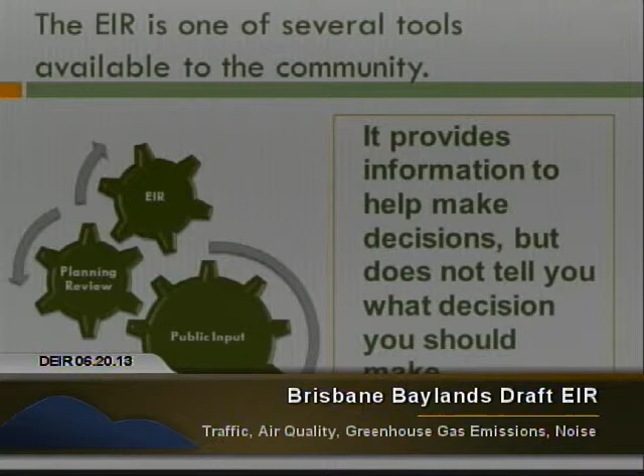He's doing great. The EIR, in a lot of communities, will be looked at as the answer to everything and provide everything we need to know. Really, this is just one of the tools that you as a community, the planning commission, and ultimately the city council will have to make a decision about the project. And I'll describe what that project is.

Besides the environmental impact report, which will tell you about the environmental changes that would occur with the project, there is a planning review: does this fit with our view of what we want the community to be from a planning standpoint? Does this fit with our rules? And then public input from the community: is this what we want to see for our community?

That will be part of the public hearings that come at the end, the written letters that come in from you on the EIR, and the testimony that will go on. Only after all of that will the Planning Commission and ultimately the City Council make a decision on the Baylands and development of the Baylands.

The review that we're going through now is a 120-day period, and that's much longer than the typical 45 days that communities get to review an environmental document.

Given that this is 1,200 pages long and very detailed, and it's such a complex project, the City Council determined that a 120-day review period was appropriate, and that's what we're going through right now. The document in front of the community is called a draft environmental impact report.

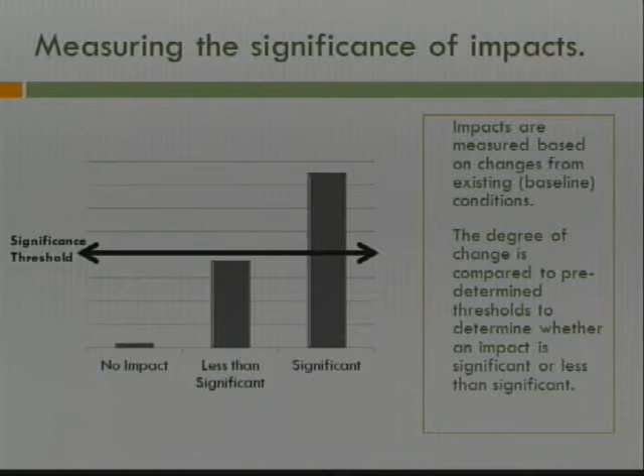State law provides that a community can adopt a project that has significant impacts that cannot be avoided. It also permits a community to deny a project even if there are no significant impacts. So that sense of good and bad for a project is different from whether there are significant impacts.

Let's talk about the structure of the document, and then we'll get quickly into the project. The document has an introduction that lays out the basic rules, and an executive summary that identifies all of the impacts and all of the mitigation measures, printed on 11 by 17 sheets.

A project description that describes all of what is in front of the community to decide on, and all the various components of the project, and then an evaluation of impacts and mitigation that I'll show you how it lays out, and alternatives.

So not only is the project that's being proposed on the table, there are a series of alternatives, as we talked about last night, also provided in this document, so you can compare how we might change the project to reduce impacts, what other kinds of things can be done on this site, and how modifying the project affects the level of impacts we have.

And then finally, a discussion of growth inducement, meaning what kinds of things might spin off from a project to create growth elsewhere, and cumulative impacts, how does this all add up when you take development of the Baylands, Hunters Point Shipyard, Candlestick Point, Visitacion Valley, the redevelopment, and all of what's proposed in Daly City. When you put that all together, what does that mean? So we're not just looking at the one project.

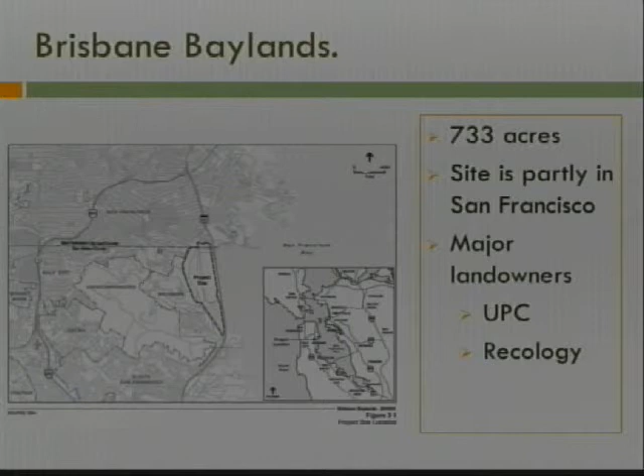The project itself, the Brisbane Baylands, consists of 733 acres, mostly within the city of Brisbane, but a portion of the Recology site is in the city of San Francisco. Major landowners are UPC and Recology, and we'll talk about their proposals as we go on.

The project and the EIR that you're going to review is called a program EIR. This is not the same as Kaiser proposing to the city of San Leandro that they're going to build a hospital right there, analyzing that hospital where you have a site plan for it and know exactly what it's going to look like.

What is being done here is an analysis of a set of rules, and what is intended to be built over a 20-year time frame, analyzing all of the different actions that would be taken over that 20-year period to approve and build a project.

Build real projects, and you'll see the phrase in the EIR, site-specific development. When you see site-specific development, we're talking about a building on a site within the Baylands, as opposed to the project, which would be all of these components.

And so right now, this program EIR evaluates all of the actions that could occur over that 20-year period, all of the development that could occur under the proposals being put forward, and establishes environmental performance standards that must be met in the form of mitigation measures, setting essentially a cap on levels of impact for those site-specific developments.

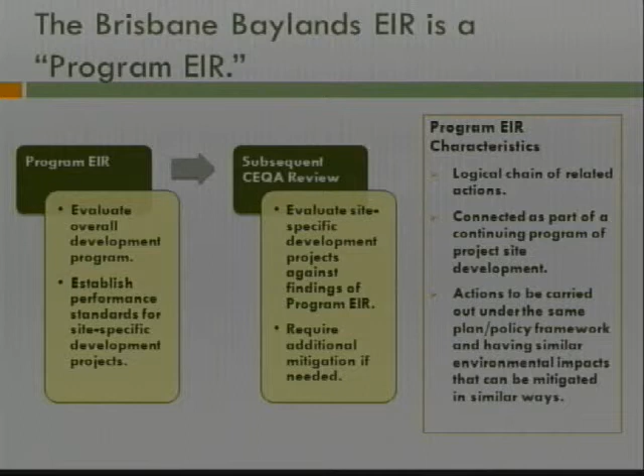Then, as individual site-specific developments come through - whether it's a Recology expansion in one scenario, whether it's an office building, whether in one of the scenarios it's a residential project - anything that requires a discretionary action, a conditional use permit, an amendment to a specific plan, or a new specific plan, requires new environmental review.

Not necessarily a new EIR, but it will require future environmental review of that site-specific development. Is it within the parameters of the program EIR, or is it something else? There are a set of rules in state law that govern what is the appropriate form of environmental documentation and under what circumstances a site-specific project would need a new EIR, and in what cases they would not.

So the project components that we're going to talk about: at the most general level, concept plans, which are basically land use scenarios, called scenarios in the EIR for the development of the Baylands. There are 4 of them that I'll describe quickly once we get through this. There's also a general plan amendment, a proposed change to the city's general plan, because as we talked about last night, all of the scenarios on the table...

and we'll talk a little bit in terms of traffic tonight, require changes to your general plan for development of the Baylands. In the case of traffic, nearly anything you would build, or really any development on the site, would require at least one amendment to your general plan. So there is a general plan amendment.

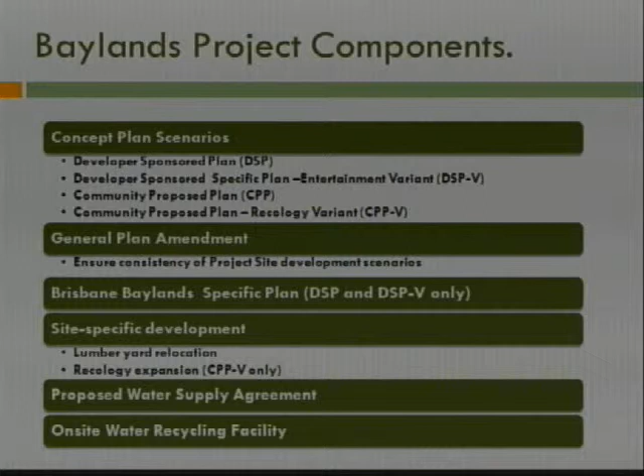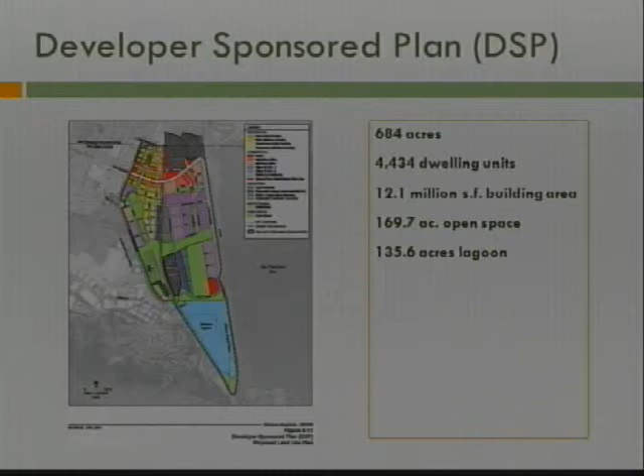So the 4 scenarios include a developer-sponsored plan. This is part of the specific plan that started the process. It covers 684 acres, not the entirety of the site, because the Recology site is not part of the specific plan. It proposes 4,434 dwelling units and about 12 million square feet of building area, plus open space and the lagoon. The key parts as we get into traffic and air quality will be 4,434 dwelling units and a total of 12 million square feet of building area.

There is an entertainment variant to that specific plan that you'll see in the EIR called the DSP-V, Developer Sponsored Plan Entertainment Variant. Same 684 acres, same number of dwelling units, slightly less building area, but it does include a sports arena, 17 to 20,000 seats, a concert hall, more hotel and conference facilities than the developer-sponsored plan, and overall slightly less square footage.

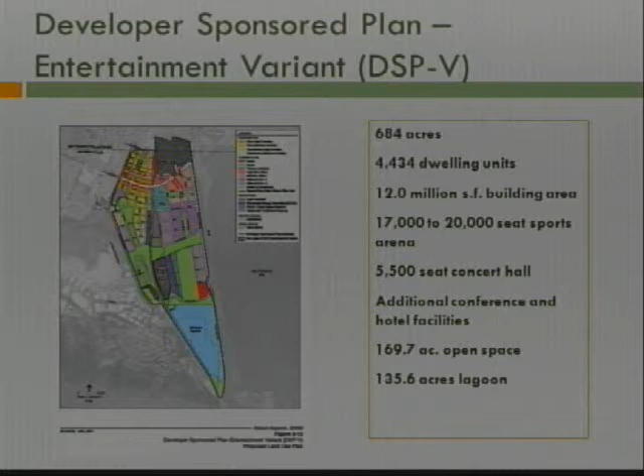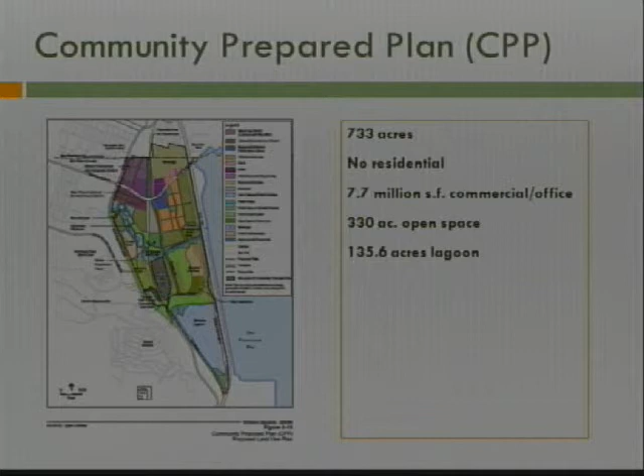You went through a couple of years ago a series of meetings that concluded with a community prepared plan and a variant of that. The community prepared plan was from 2010 and covers 733 acres, the entirety of the project area. There is no residential proposed in that scenario, and you'll see as we get into issues of traffic and air quality how that plays out in terms of these impacts. And only about 7.7, far less building area—7.7 million square feet is a lot, but far less total building square footage than you see proposed in the developer-sponsored plan.

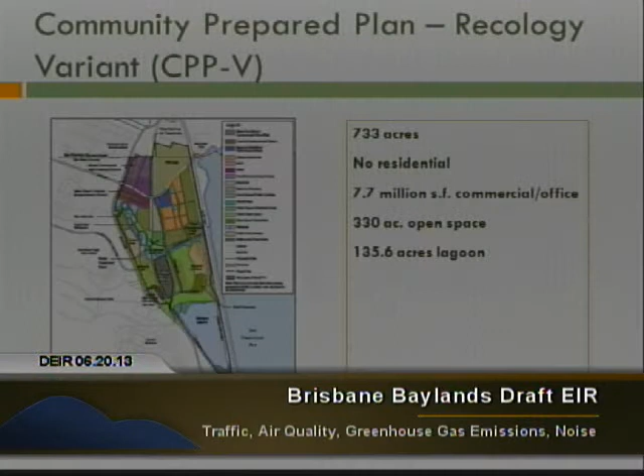And the fourth scenario is all the same acreage. This is the Recology variant, part of that community prepared plan. The basic difference here is an expansion of the Recology facility from 250-something thousand square feet to about 1 million square feet, and that occurs up in—you can see the Recology site is much bigger than it is in other scenarios—an expansion or modernization and expansion of the facility.

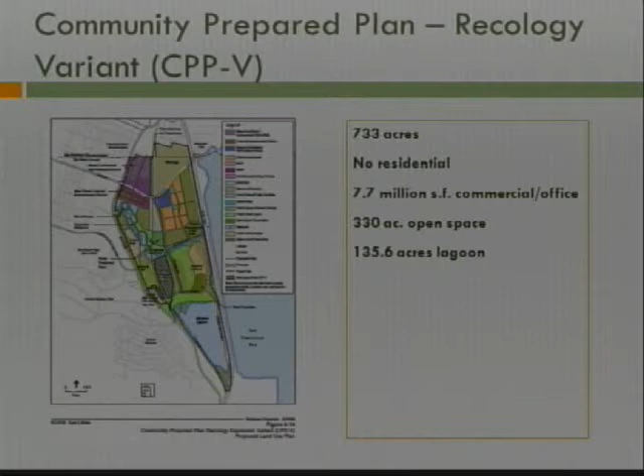As we look at the impacts—our traffic, our noise, our air quality—these are geared to build-out occurring over a 20-year period. So when we look at impacts of the project in place, we will be using for traffic purposes the year 2030. We'll also look at water supply: is there a 20-year supply?

Remediation of existing contamination at the site would be initiated at the very beginning of the project, because the sites that are now contaminated, obviously remediation must be completed before you can build on them.

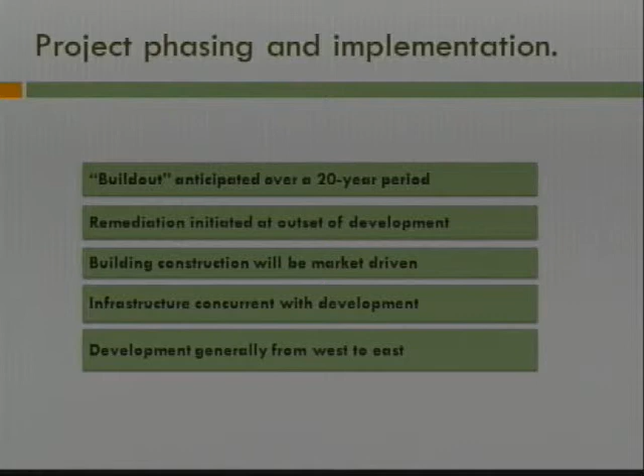Construction, the actual pace of construction will be market driven. There is not anything you're going to see in the EIR or in the specific plan or any of these scenarios that say this is the order of development, it will be this much per year, this building, this area goes before this one. As specific as it gets in terms of phasing of the project is it will likely move from west to east.

It's not going to be any more detailed than that. So as we look at construction impacts, those are assumed to be occurring in increments over a 20-year period. The infrastructure, roadways and water, wastewater facilities will all be put in place as part of development, along with that timing of the pace of development.

That is the project. So now let's talk about traffic.

In terms of traffic, the key issues that the traffic section looks at are the performance of roadways and highways, so vehicular circulation on city streets, on the freeway, at freeway interchanges, and how well do they perform today, and what will be the change in their performance with development of the Baylands as it's proposed under all the four scenarios.

It looks at transit. What are the impacts on BART with additional users, on Samtrans, on Caltrain? What are the effects of site development on pedestrian and bicycle systems? All of that is analyzed in this section.

Then it looks at safety issues. Are there issues in terms of safety, incompatibility of land uses, emergency access? Can the police department make their way through the site where they need to? Can fire engines get where they need to? Roadway design, are they designed in a manner that will create safety issues? And then a look at air traffic patterns.

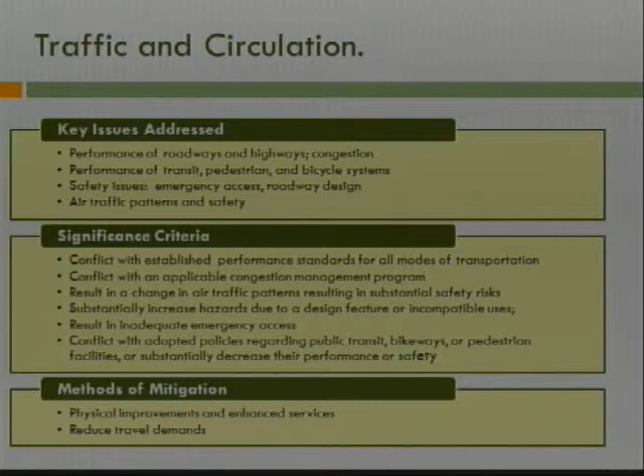So that is how you increase the capacity of the system. That's one set of mitigation measures. The other way that you have to deal with traffic is reduce the amount of demand. And so we look at transportation demand management.

What kinds of things can be done to get people out of their cars onto transit? What do you do when you have the transit overcrowded? But how do we reduce the amount of demand?

And when you see, in terms of traffic, significant unavoidable impacts, and there are some here, some impacts that simply cannot be avoided, you then look to, as a community, the alternatives to the project. How might we deal with the project itself and look at our alternatives? How can we reduce those significant unavoidable impacts and ultimately make a decision what is in the best interest of our community?

So one of the things you'll see, and I'm not going to read these all, the list that we had is what is called Appendix G of CEQA.

If you want to see the basic statewide significance criteria, just do a search for California Environmental Quality Act Appendix G, and you will see these series of thresholds. In the case of traffic, they're fairly general.

Would it exceed standards? What we look at, and the way this section is organized, is a total of 17 different impact statements.

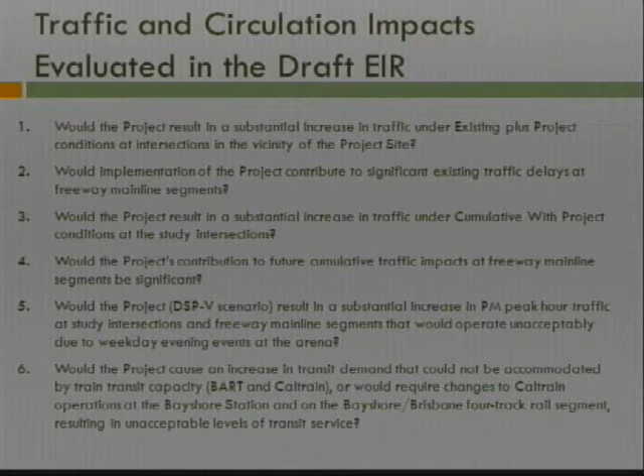On the flip side, when we look around the Baylands, even if nothing were ever built there—none of these projects approved, nothing built—and Daly City builds out all their proposed projects, and San Francisco builds out all of theirs, and everybody else in the Bay Area builds out their general plans, that interchange, or the two interchanges along the freeway, are going to be in very bad shape. They will go over capacity. Bayshore will be way, way over capacity, and that background traffic all by itself requires these major improvements.

Now here is the rub as we look at traffic. So we look at the second part. Remember, existing plus project is one thing. The other thing we do is look at what happens with all of these projects.

All of the development proposed in San Francisco, in Daly City, in South San Francisco, throughout the Bay Area, plus the Baylands—we look at the cumulative effect of all that traffic, and what the Baylands' contribution is to that major traffic increase. So you will see existing plus project, and cumulative without project, cumulative with project.

We'll look at, in the EIR, not only existing plus project, because traffic never occurs that way. That's one of those things—comply with the law, and it doesn't make any sense—but we had the judge tell the city of Sunnyvale, you must do it that way. So we have that analysis in there.

The one to pay attention to is cumulative without and with project, because that will tell you, 20 years from now, the total traffic load and this project's contribution to that.

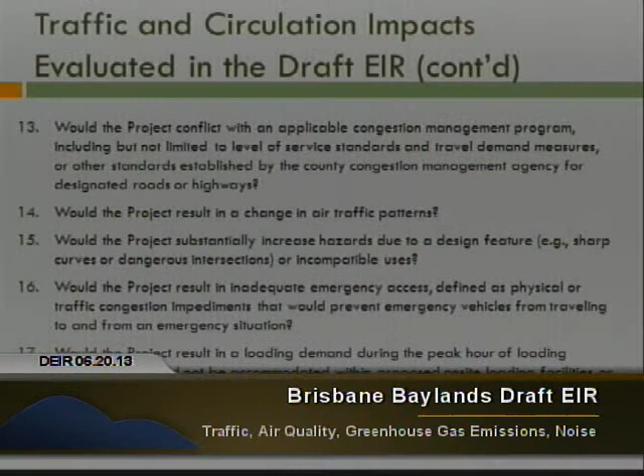So let's go to the method of analysis. As you take time looking at the document, or even just use this to read those 17 impact statements—what are the 17 different things we look at? That is the total of the analysis.

Now the way we do this analysis is there is a traffic model done by the city of San Francisco called the SF CHAMP Travel Demand Model.

CHAMP must stand for something because planners love acronyms, though I don't actually know what it stands for. But there is a traffic model, and that is the accepted model for this portion of the Bay Area.

It's used to analyze traffic patterns. What happens when you add development? What happens when you change the mix of uses, or the relationship of residential to employment, to where people live and shop? This gets measured in terms of daily person trips, how many people move from where to where, in what are called traffic analysis zones. San Francisco alone is divided into about 980 different zones, so you analyze the movement zone by zone.

This model says for very short trips, people are much more likely to walk, or take a bicycle, use transit when there are stations at both ends, or drive. The CHAMP model measures increases in auto travel on the major roadway and freeway system, analyzes changes in transit patterns like how many people try to get onto BART, Caltrain and Samtrans, pedestrian patterns, and bicycle patterns based on where people are going and coming from.

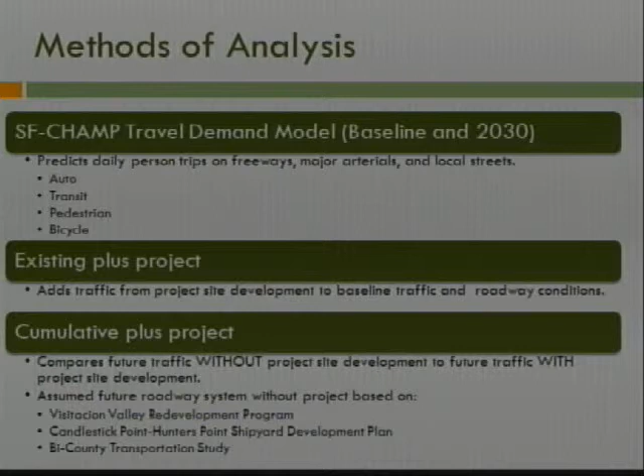The major projects analyzed in the EIR, and the major improvements assumed to be built in the future, come from requirements like Daly City's redevelopment program, which required certain facilities in that redevelopment area, and San Francisco's requirements for development of Hunters Point and Candlestick Point. There's also a bi-county transportation study, a joint study by Brisbane, San Mateo County, Daly City, and San Francisco looking at this corridor where counties and cities meet, with major joint facilities planned such as the Candlestick Interchange, Sierra Point Interchange, and Geneva Extension.

So in the future-without-project scenario, we assume these facilities, 20 years out, will be in place, because those requirements have already been placed on existing development.

You might ask, if we assume those facilities are already in place, are we letting development within the Baylands off the hook for their share of the impact of needing them? The answer is no. As part of the impact analysis, we look at the project's contribution to these regional facilities. It would be unfair to assume a system where Candlestick Point builds out its land use approval from San Francisco, but somehow never builds any of the roadways San Francisco required.

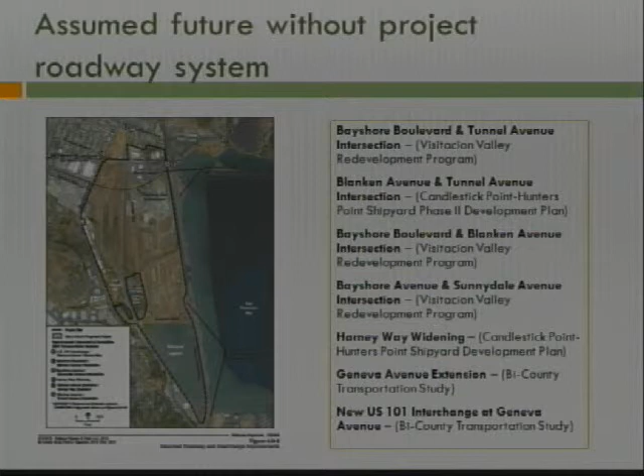You will also see in the traffic section a concept called level of service. This is how we determine traffic performance, which is measured in terms of how long you sit at an intersection. So level of service in traffic is measured at intersections.

Intersections are used because congestion occurs there before it occurs on the roadway in between, since that's where all the conflicting movements happen, like left turns, right turns, and people stopping to wait for the other side to go. So the traffic study analyzes intersections, not the capacity of how many lanes are on a street.

And that's because the intersections will govern—we need this many through lanes, and that is what will govern the roadway in between. You will see this graded.

And for better or worse, the traffic engineers use A, B, C, D, and unlike school, E and F. The only one that you can translate to what we all remember from school is F, which is failing.

But this is not a situation where we want to be better than average, so we'll look at level of service B—that's really good, but it would be even better for A. This looks at how much time at an intersection you can afford to wait. Do people want to wait? How does the movement go through an intersection?

That is what some of those intersections would take to move at relative free flow. So in terms of traffic, the basic standard used for most intersections in this area is level of service D, which is not like school—that's below average, and that means almost failing.

The idea is at a signalized intersection, somebody would wait 35 to 55 seconds to make it through. At an unsignalized intersection, if you're at a stop sign, you're going to wait 25 to 35 seconds. And as you will see in this section, it's not even possible to get to that level of service 20 years from now, because picture left turns.

If you've ever been at an intersection with 3 left turn lanes going, it gets very confusing, and you finally get to a point you can't move that many cars through. But this is the basic way level of service and traffic is identified.

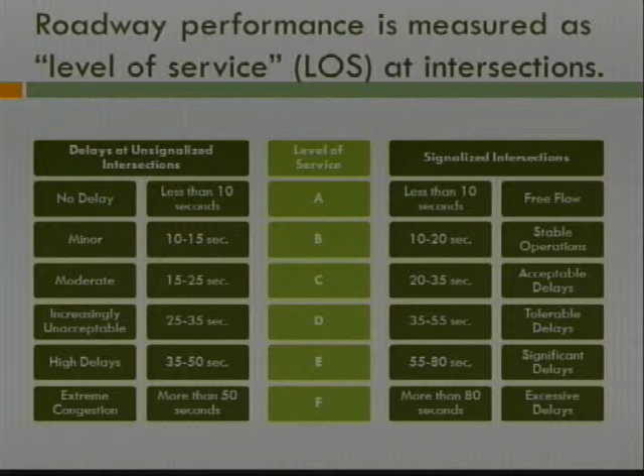Now, the other thing you'll notice is traffic is measured in the peak hour. Traffic is not measured as, we got this many cars per day. Traffic impacts will be measured in the morning peak hour and in the evening peak hour, because as we all know, that's the time it gets congested.

And it's really nice that at 2 a.m. you can go down a street and go through an intersection and it works terrifically. But traffic does not average itself evenly over a day, so the impacts occur in those peak hours.

And one of the things you will see here is this identifies the number of trips generated by each of the 4 scenarios in the morning peak and the PM peak. And the part that took us by surprise, me as an environmental consultant, when I saw the outcome of the traffic model, is the greatest amount of traffic in the peak hour is created not by the project that has the most building area to it.

It's created by the community prepared plan that has 7.7 million square feet of development, as opposed to 12.

And the reason for that, as we started looking at why that occurs, is because remember, one of the things that happens is where you have residential immediately adjacent to employment—people, some, will choose to live near their work, so they can ride a bicycle, walk, or use any other means.

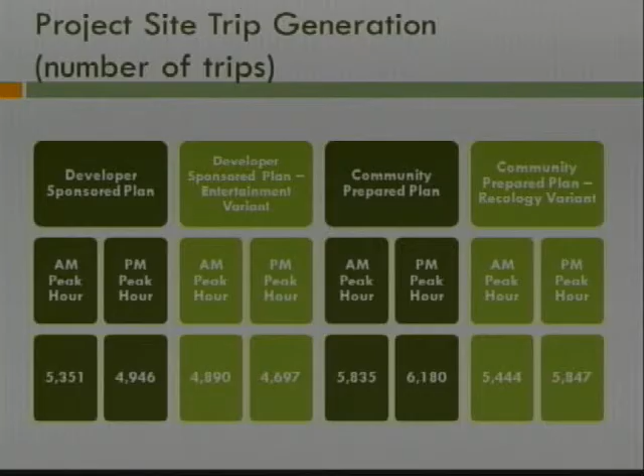And within a development site that has a mix of uses, there's what's called internal capture. Not all trips leave the site; not all of them get out onto the surrounding roadway system. So this is one of those places where the significance of an impact isn't necessarily good or bad—you need to weigh value judgments against this.

So what this is telling you is, by looking at mixed use—what happens when you add a mixture of residents in close proximity to jobs—you get fewer trips.

So part of the trade-offs, as you look at this, there's a whole other series of impacts related only to residential, but in this case, the mix of uses creates a lesser impact. And as I said, that has nothing to do with good or bad—it only has to do with how traffic reacts with that mix.

Some key takeaways in terms of this section and things to look for as you read through traffic. I've mentioned these, that the major improvements, the Geneva extension, the interchanges, not needed under existing plus project, but as I said, it's required by CEQA, not reality in terms of what traffic will be like in the future. But that level of service standards get...

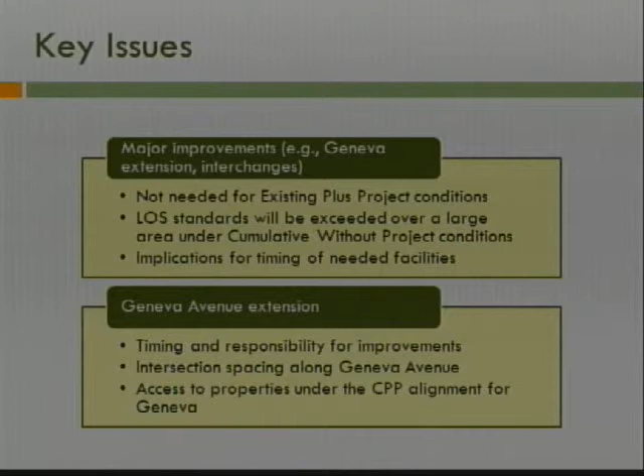As you will see in the developer-sponsored plan, there are intersections along Geneva that are pretty closely spaced. If you go into downtown San Francisco, we know blocks are not very long. If you look in more suburban areas on the big major streets, it's ideally half a mile between intersections. And so when you start spacing intersections close to each other, if you analyze, as is done in the traffic modeling, the operation of an intersection, it could look like it's doing just fine. But 30 seconds of delay backs up traffic.

How far? And if the intersections get too close, operations at one intersection can affect another, and they start mounting up. So the mitigation measure that is provided here is that the ultimate development of the developer-sponsored plan, with those closely spaced intersections, goes through an analysis of how do you handle signal timing, how do you handle coordination of signals, how do you handle your traffic loading onto the individual intersections so that the operations at one intersection do not affect the next one.

And that's a performance standard. Remember I mentioned at the beginning, performance standards that future development will be required to adhere to. That's one of them. The other issue that comes up is picture the Geneva extension under whatever alignment.

There's now, you get off the road at Beatty, you get off the freeway and you go across the tunnel road. Well, when you build a major roadway that goes off an intersection in just about the same place, and you're going to build a grade separation so you can go up over the railroad, the key to that is no matter how development occurs, access to properties needs to be kept in place.

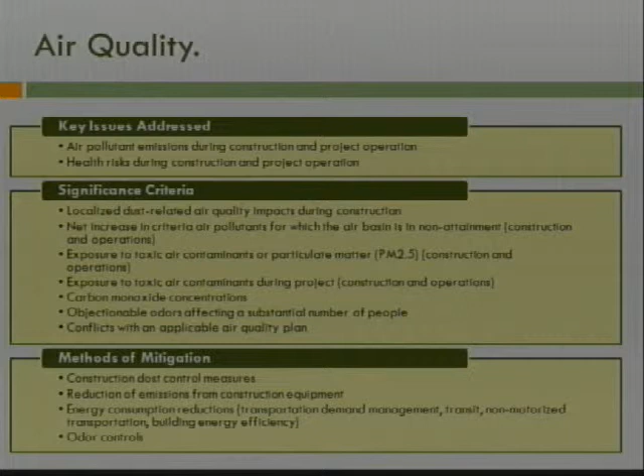The basic criteria that you will see in the significance thresholds come from the Bay Area Air Quality Management District. I've never quite figured out how this works, but they actually measure gases in pounds per day. Pounds of gas, just a difficult concept, and tons of gas per year. And so those are the thresholds: if the project will result in more, that's significant; if it results in less, it's not. So these are the basic criteria that are used and the requirements in analyzing these pollutants.

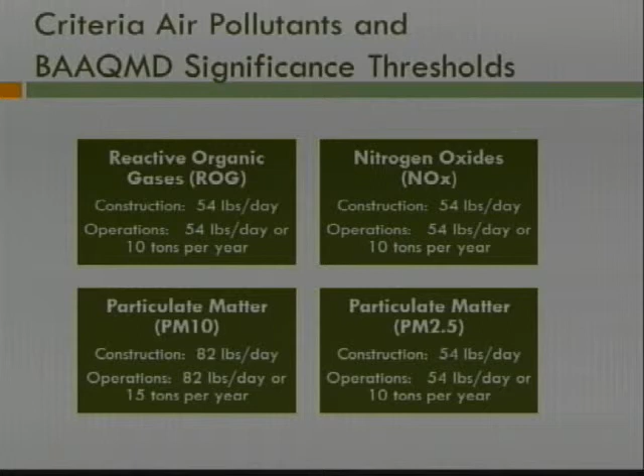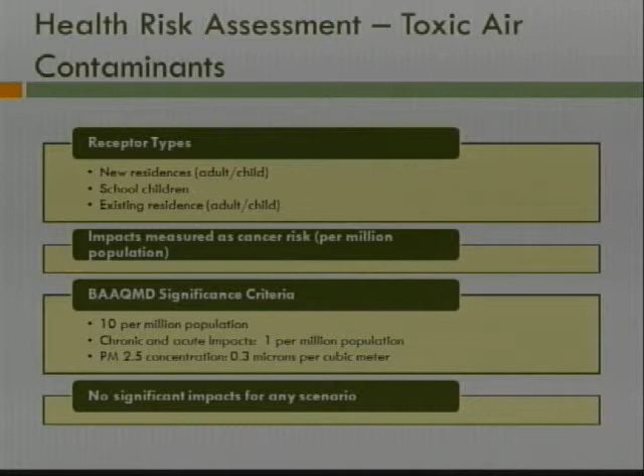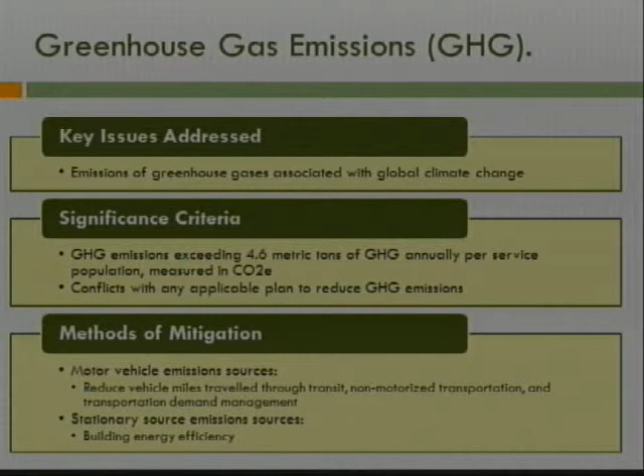Remember what we saw in traffic - basic measures or methods of mitigation for motor vehicle emissions. You can't control as a community what comes out of the tailpipe of automobiles, but you can deal with how we reduce the amounts of traffic, reduce traffic generation, and then address stationary source emissions like building energy use.

And again, level of impact, significance versus less than significant, is not good or bad. It's simply the way it is. So that good or bad is not what we're judging in an EIR. We're determining, is it above or below a threshold? In this case, the single-use project, the non-residential project as opposed to a mixed-use project, yields a greater impact in terms of greenhouse gases.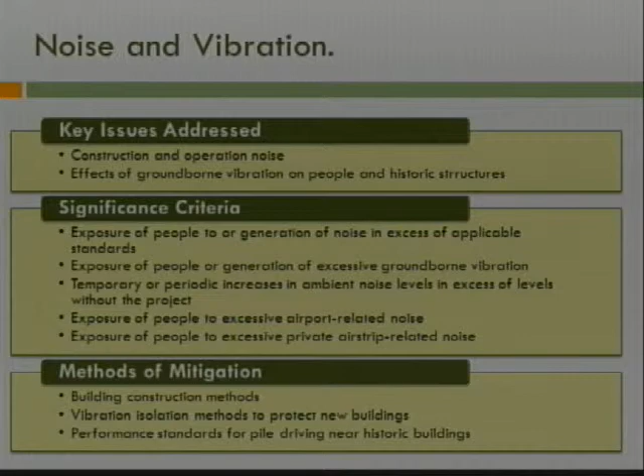Noise has all sorts of terminology. It's measured in decibels - you'll see dB, you'll see dBA, because pure sound energy is not how human beings hear sound. We hear sound at certain pitches better than at others, so there's an A scale that weights it the same way people hear. You will see LEQ - that is sound averaged over a typical period of time, most often one hour.

You will see things like L50, sound over a half an hour. You will see L10, sound over a tenth of an hour. Some of your noise standards are actually written that way, in terms of this is the maximum noise level that you can have over half an hour - you can exceed that no more than half an hour, no more than 5 minutes. That's L50, L10, L5. You will see L max - that one's probably the easiest. That's the maximum noise level.

Instantaneous peak. You will also see averages of noise. DNL, which is a day-night noise level, averages the sound energy of noise over an entire day, but says noise at night, noise at 2 a.m., is a whole lot more irritating than noise at 2 p.m. So noise at night is essentially weighted heavier than during the day, giving you an average over a daytime. CNEL, typically used for airports, is averaged again over an entire day, with a penalty not only for nighttime noise, but also for noise during the evening hours.

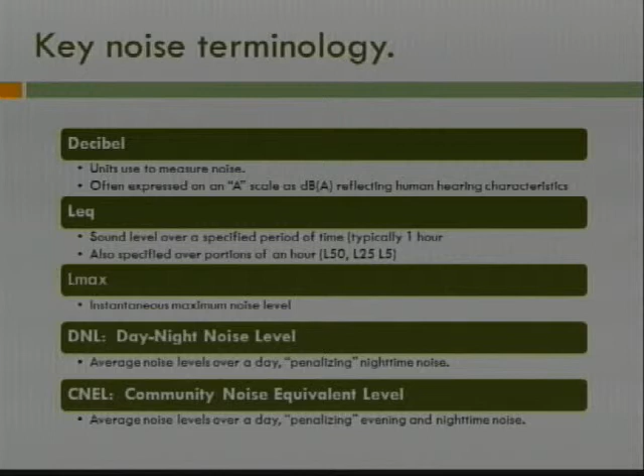Things to remember in terms of how we determine significance of noise: I have a microphone here, but if two of you are standing talking to each other in a normal voice, you're going to be talking at about 65 decibels. A change in noise level - in a laboratory, under carefully controlled conditions, somebody can perceive a change of 1 decibel.

Under normal circumstances, people cannot perceive, outside of a laboratory, a change of less than 3 decibels. At a 5 decibel change, from 50 to 55 or 60 to 65, that becomes very noticeable. So you'll see a 3 or 5 decibel increase used as a criteria for determining at what point a change in noise becomes significant.

A 10 decibel increase in noise you would perceive as being twice as loud. And this is not a nice even scale, it's not like adding 1 and 1 - if I have 2 of these and add 2 more, or 50 and add 50, I've got 100. When you look at noise, it's on a logarithmic scale.

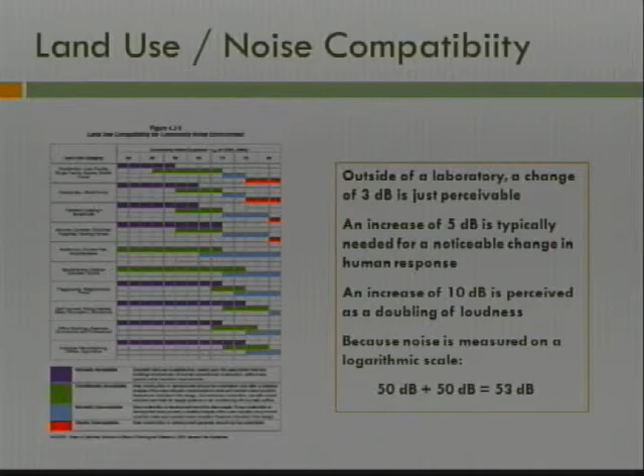In terms of noise, existing traffic and railroad noise is not one of the major issues. But one of the things we did, because I recognize, and the EIR recognizes this, is that your community is outside of the 65 decibel noise level of San Francisco Airport.

So what the noise technicians would say is there's no impact on the community. But when you get a jet coming overhead, you don't much care that for the next 20 minutes, or for the rest of the night, there won't be any more jets, if you just got woken up. So there's a difference between that LMAX and what you perceive in terms of airport noise versus the common threshold of 65 decibels.

We do recognize and discuss that, but in terms of the project, it's not affecting noise in terms of airports. But there will be that acknowledgement that sometimes the numbers don't tell the whole story.

So I'll quickly go through next steps, and then we'll take questions. Next Tuesday night, we'll go through public utilities, which will deal with water supply, public services, police, fire, schools, libraries, recreation, and energy use and energy impacts.

On the 27th, we'll talk about hazards, hazardous materials, biological resources, and historic resources, and then a couple of the wrap-up issues that CEQA requires we look at. That will conclude the presentation of what's in this document.